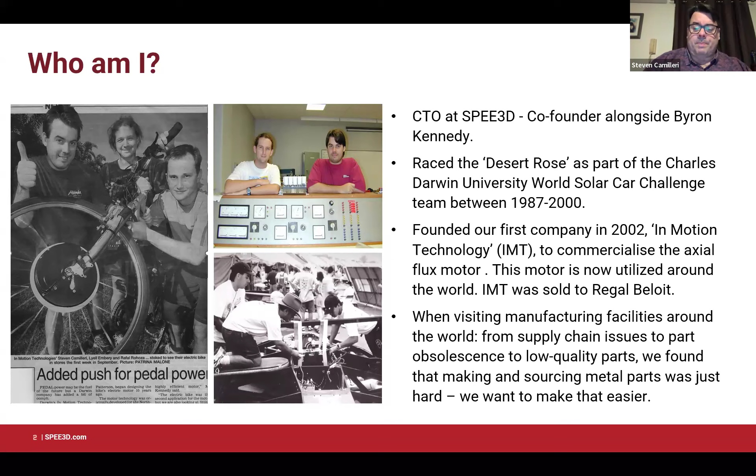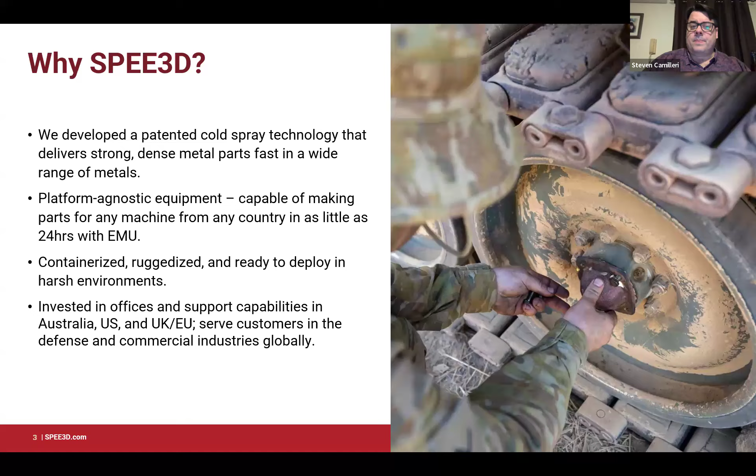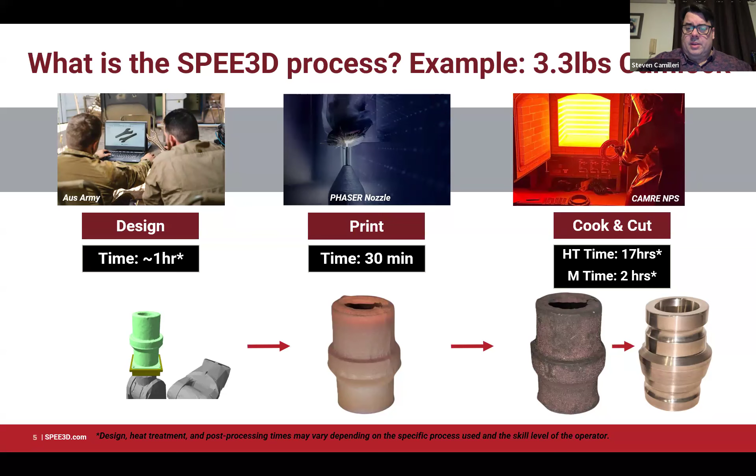I think those of you in the US will know, I think it's Limu the emu from TV ads. It's actually pronounced emu - in Australia, we say emu.

So, Expeditionary Manufacturing Unit has all the heat treatment, all the machining, all the testing capability, letting you do the full manufacturing process in the dust. That's a very popular product of ours.

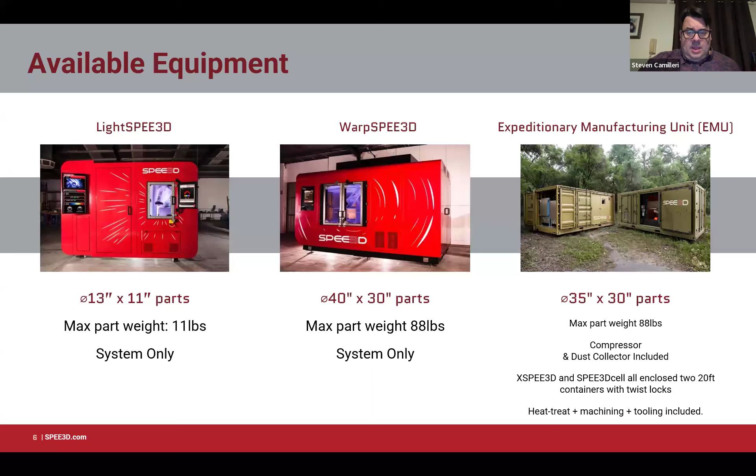We also provide powders as well through Powders on Demand. Brad kindly introduced us - he's from Powders on Demand. And of course, we have a range of services that we provide. For example, we will go out in the field, we will train defense forces. We will teach them how to do the risk assessments and the safe manufacturing processes, and indeed the testing of those parts as well.

Drag them away. So these are the stays that hold the vehicle to the ground so the crane can be used. Now, the vehicle is designed in such a way that if you have to leave in a hurry, you can just retract the jacks and the feet stay on the ground and the vehicle drives away. So what that means is you tend to lose the feet. In training exercises, it's pretty common for the troops to get an order - go here fast, set it up fast, go there fast, set it up fast - very demanding training schedules. And at some point, someone will forget to collect the feet after the outriggers are retracted. And what do you do?

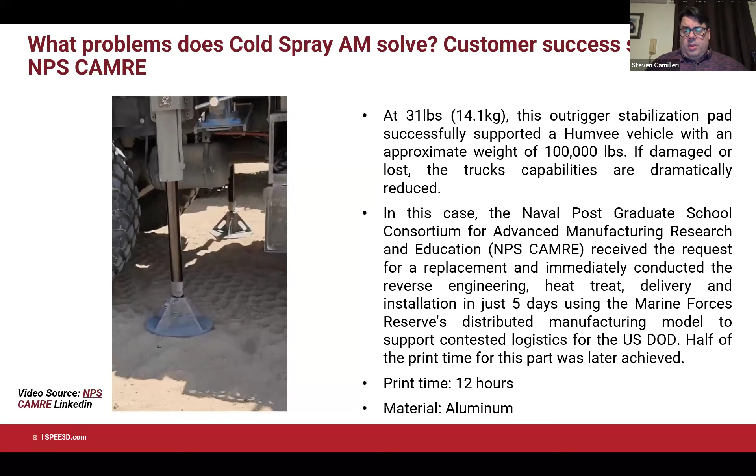And we made that in a car park at a marine base on a Saturday night. And it went out on a helicopter the next day and got tested in the field. So we were very impressed. It was able to hold the full weight of the vehicle. So it just goes to show that it's quite possible to get good material properties in the field, if you've worked hard on making sure the tech works in that situation.

So our normal cold spray system operates at 30 bar, about 400 PSI. And we've decided to push things this year. So there are people demanding better properties as sprayed from our process for different applications. So we've decided to try implementing a high pressure system. Typically we run off a compressor at about 30 bar with compressed air, and we decided to more than double that to 70 bar. So really, we've done that to improve the critical velocity of the powder, the deposition velocity, and improve the as sprayed properties of the material.

So at that stage, that's just experimental, but we do have it working. So we're busy working out how we will roll that out to people at the moment.

It's been very effective. So of course, we see increased gas consumption goes up, roughly in proportion with the pressure. So if you're consuming nitrogen, for example, you're going to double your nitrogen cost with something like that. But if you need the material properties, that's the trade-off.

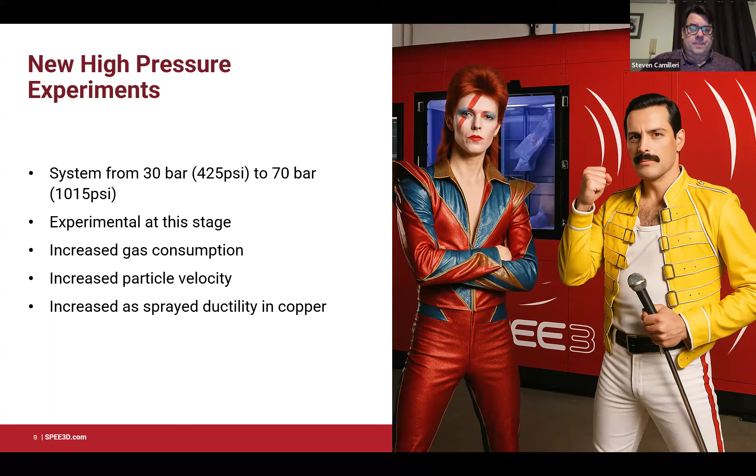So here's the real test of high pressure, which is particle velocity. Oseir were very kind to loan us a HiWatch. So we had our first play with particle velocimetry as part of this project. And yeah, indeed, particle velocimetry is awesome. We're never going to be able to go back after having access to this very high quality data.

So fantastic results, I think, from there. And I'll present some more detail on those now.

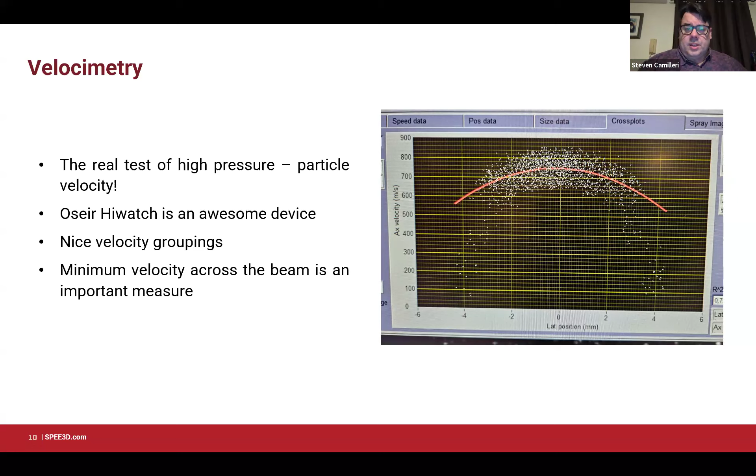Which is unfortunately flammable, but it has the bonus of making your printer smell like a donut shop. So, you know, it's not all bad.

As we increase the pressure and temperature, I've compared those results to the standard Vic Champagne 2015 paper on axisymmetric 1D estimations for particle velocity. With temperature, it correlates reasonably well, but with pressure, as we increase it, we're seeing a better velocity than the approximation estimates. So at some point I've got to nail Ozan Ozdemir or someone down to work out why that's happening.

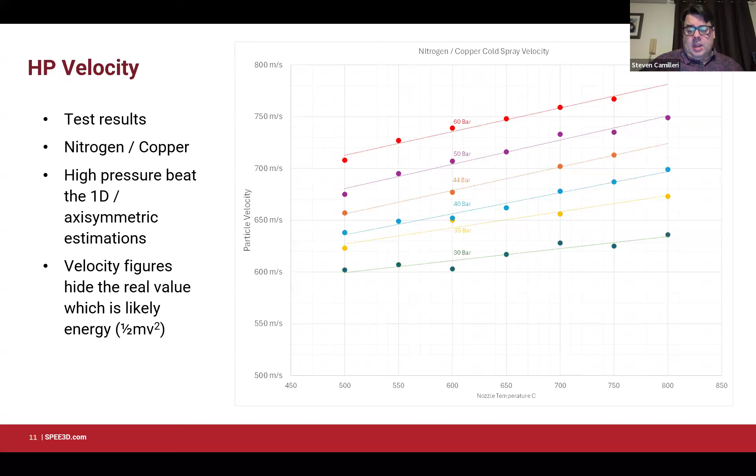It does seem to be asymptotic. So it seems like at some point we can just keep increasing the particle loading if we don't mind the velocity being lower than it might be otherwise. For those of you who haven't worked this out yet, if you really want the highest possible velocity out of your powder, just inject a very small amount of it into your process and you'll observe the highest cold spray velocity.

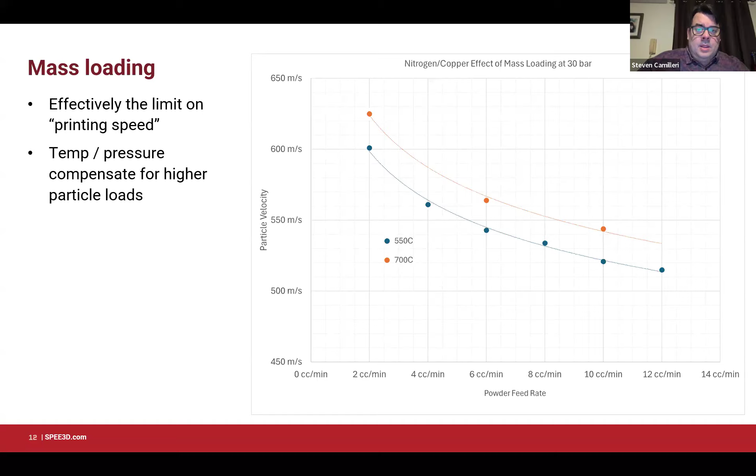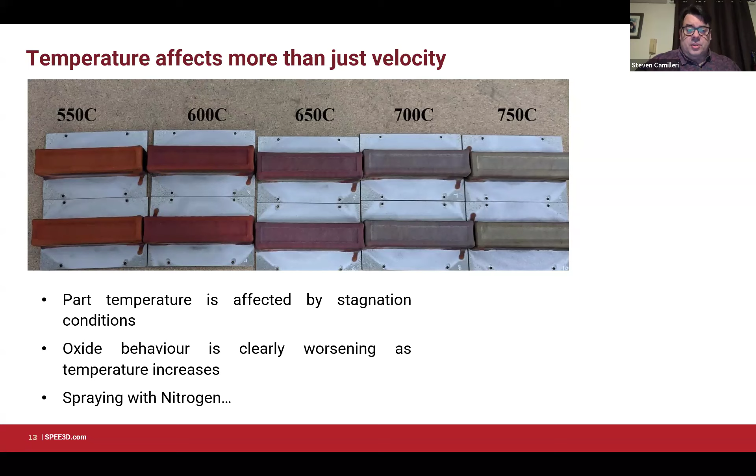Importantly, this was spraying with nitrogen, not air—we typically spray with air, but in this case we sprayed with nitrogen. So we weren't getting hot oxygen off our nozzle. All we were doing was heating the part up with the nozzle, and the ambient oxygen around the part, even under that nitrogen shield, was still enough to oxidize the part pretty comprehensively. This is a note for those wondering: spraying with nitrogen and not filling your chamber with nitrogen means your part will still oxidize. We've got the numbers here.

So really, one question that's always been in our minds is, as we're cold spraying, we know that we're adding heat to the part. We know that that's causing oxidation. Okay, but if we do see annealing behavior at low temperature, is that of benefit? We're effectively doing some heat treatment with the nozzle as we spray.

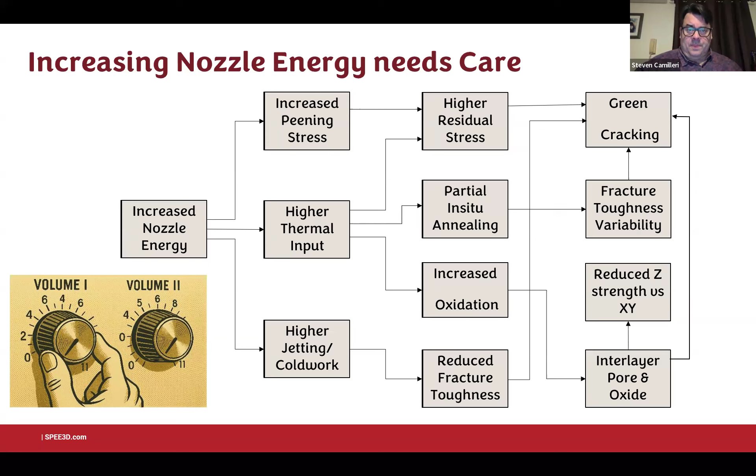It's a dominating factor. All right, that's the end of my presentation. I think we're pretty much on time. Thanks very much for your attendance and happy to take some questions.

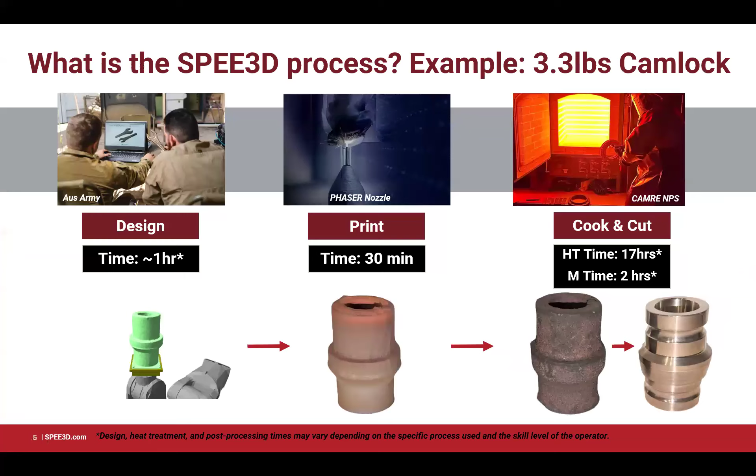So Steve, really early on in the talk, you had specifically mentioned that you guys have optimized the nozzle to be stable over a really long time, which is critical for AM. Can you talk a little bit about why that's critical for AM, and then also what that means physically with what you all have done for your nozzle configuration to ensure that you do have that stability over a long time?

Yeah, okay, so this is a very good question. I guess this is why it's important to be a freight truck and not a Lamborghini. If you're making a Lamborghini, nobody really expects a Lamborghini to be an awesome courier vehicle. It's not very good at carrying packages, and it needs a lot of servicing, and presumably the tires are expensive. But if what you want is a Lamborghini, if you're doing material science and you want your cold spray nozzle to give you the absolute highest velocity, then you'll construct the nozzle in such a way so that depending on the powder, you can kind of meccano build up your nozzle and optimize every part of it to give you the best possible velocity. So that's very important for that market, but that's not really the market that we're in. We might, for example, print 200 pounds of material in the case of a Titan printer in one part.

So when you're typically building a part that large, you've got to treat the process more like a manufacturing process. Manufacturing processes require good predictability, so what that means is every portion of the material, every unit of volume in that part, needs to have been made with a process that did as you expected.

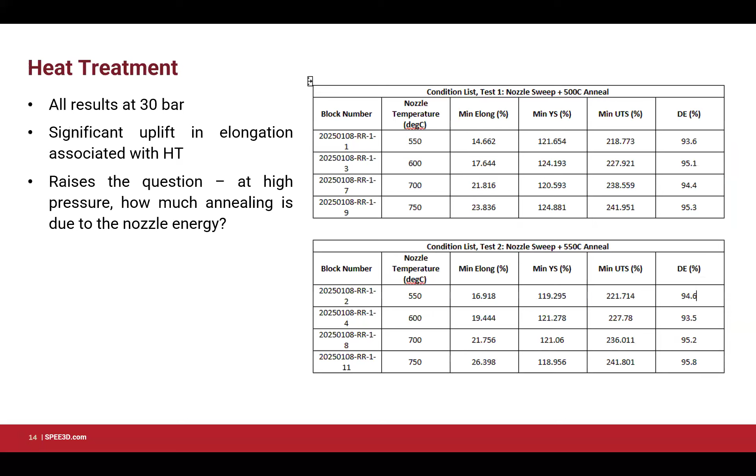So what's the configuration for the tensile test? Is it just a conventional dog bone, and is it an XY dog bone or a Z direction dog bone? So I think it's an XY, ASTM E8.

I think it's a micro specimen, about 120 millimeters long from memory. Planar specimen with about a 6 by 3 millimeter test section, something like that. So pretty standard, it's ASTM compliant, and we do that. These results came from an outside lab that we use.

Sorry, what was the second part of the question? I think you got it there.

Looking at it real quick, my thought is your UTS is consistent and your yield and hardness are going in about the same direction. I wonder if you're effectively getting different cold work levels of the copper, going from quarter hard all the way to full hard essentially, because that doesn't change the UTS, but it does change the yield strength and the hardness.

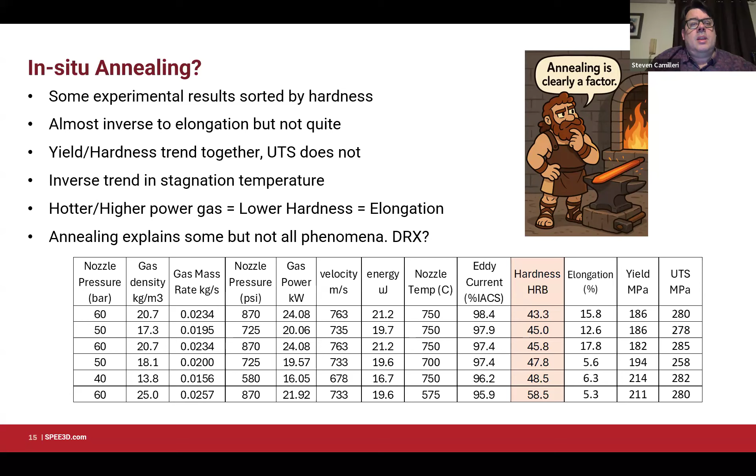So indeed, the process that we've described here, where we compact the powder using a cold spray nozzle and a robot, and then we take that compact off and we heat treat it. Not in this paper, but we do sintering, including very advanced forms of sintering, which we've taken really from the great body of literature in PM. It's incredibly effective on cold spray compacts.

For example, our nickel aluminum bronze, I think I presented on that at CSAT last year. Anyone who's interested, we used a blended elemental metal approach to form a compact, and then we used liquid phase sintering to form the alloy. It's an alloy made of copper, aluminum, nickel, and iron. We literally took the powders, blended them together as though we were making a cake, sprayed them together, and then heat treated them in a process called liquid phase sintering, which let the alloy form quite homogeneously without changing the shape of the part.

So that's an incredibly useful process. We can take compacts straight out of this process, and we can throw them into a HIP, and we can get something that's very like a HIP PM part, but we don't need the can, and we don't need to evacuate the can. So that's quite advantageous as well.

All of these processes are powder metallurgical in nature. You're taking a powder and using the deep level of control you have because you can physically manipulate a powder, versus melting it where uncontrolled processes happen. As a result, you can form a shape and a material composition, maybe a graded composition or an exotic alloy, which you can then form by heat treatment with standard PM routes.

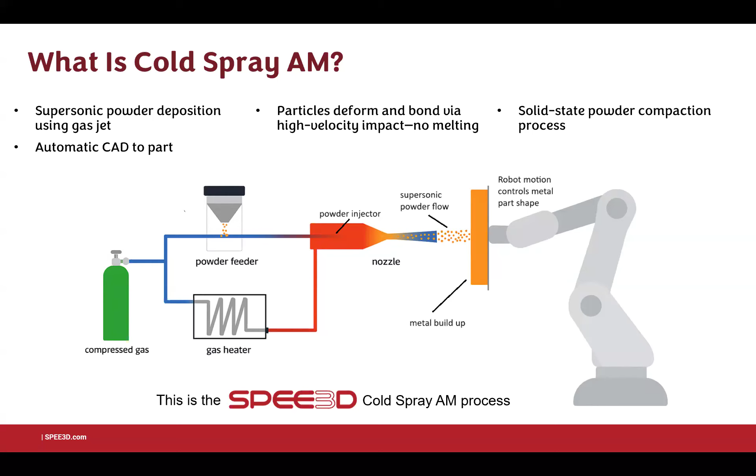Okay, very last one from me, and then I think we'll cut out a handful of minutes early here. You had mentioned TwinSPEE3D and the origin of the name being a digital twin of the part, which is really cool - I haven't thought a lot about this before, but I think it's really neat that you guys are building the digital twin from a very sophisticated simulation before you even build the part.

Have you looked at comparisons between your digital twin, both during the print, after the print, and after heat treatment and finishing? And also, have you looked at defect prediction and defect detection in the context of having this super high fidelity digital twin?

Yeah, very good question. So we've done a lot of different kinds of study. Fundamentally, the reason we developed the software that way was because we really wanted to know, firstly, what the toolpath would do to the geometry - those of you that have done handheld cold spray will know it's not really super predictable what'll happen.

So we needed the simulation for our own sanity when developing the first processes to toolpath automatically. But it also gives you very direct feedback - if you've done something that turns out not to be manufacturable and results in an odd shape, the simulation will show you the good and the bad, honestly. That's what a good simulation should do, I think.

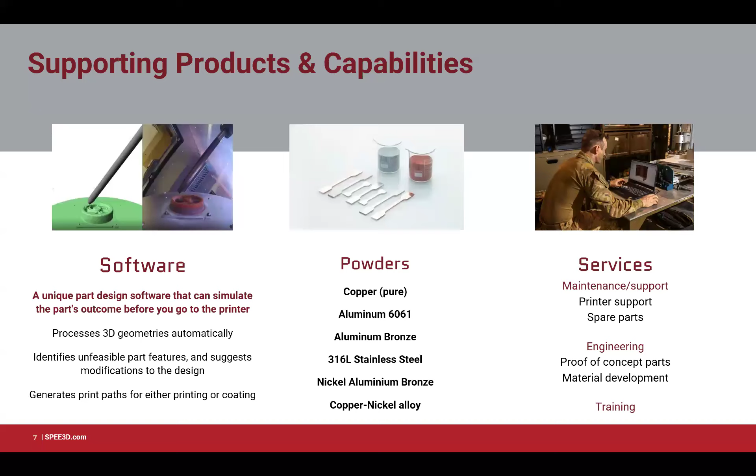Thanks for hosting, guys. Have a good one. Bye.